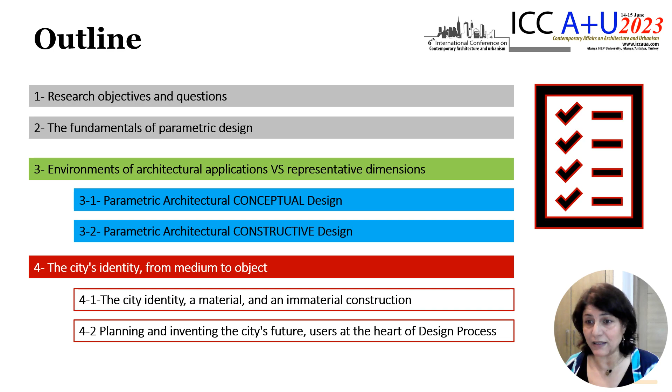I'd like to present the subject of my research entitled Parametric Architectural Design for a New City Identity, Materials, Environments, and New Applications. The outline of the presentation is structured as we present it through the methodological illustration. Our research is organized around four parts and is based on methodology that combines theory and practice.

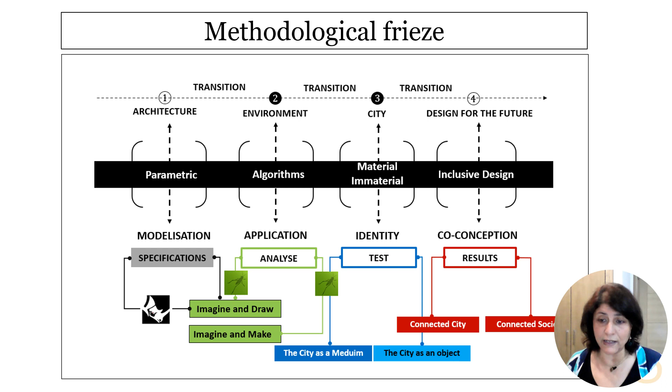First, we will start with an explanatory part dedicated to architectural application environments and their dimensions. Third, we will distinguish between the characteristic of the city as a medium and the city as an object. In the end, a new architectural vision will be discussed in order to include the user as the first actor in the design of his city.

Our research objective is to gather elements that could consolidate the new parametric modeling experiences developed by designers and researchers in spatial geometries with the new constraints of architectural construction, for a homogenized territorial interpretation and a better city identification.

The questions of our research are: what are the new investigation environments that parametric design explores to optimize the lived experience in the city? Does the architectural viability of the city rely on the safeguarding parameter of its environment or its constant updating? What are the required modeling parameters for an appropriate city transformation?

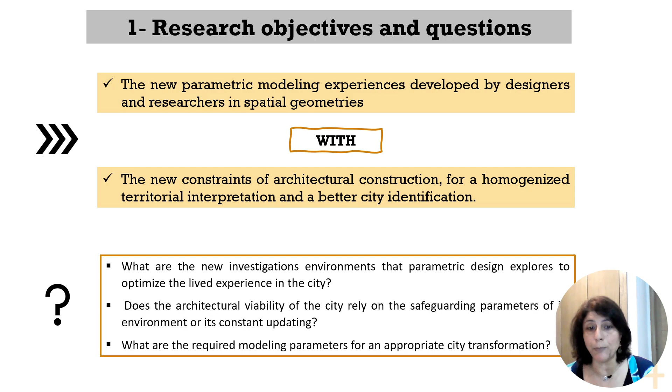Generated architectural modeling is a methodical design in which the insertion of sound, image, and architectural models is generated from the implementation of several rules depending on very specific algorithms.

Parametric architectural design is an innovative approach in the field of architecture that is intended to create buildings and public spaces using advanced digital tools. It's founded on the use of parameters that control all aspects of an architectural project, from geometry to environmental performance.

That's how John Frazer added that computer modeling is a method of virtual representation that provides a form of electronic prototyping.

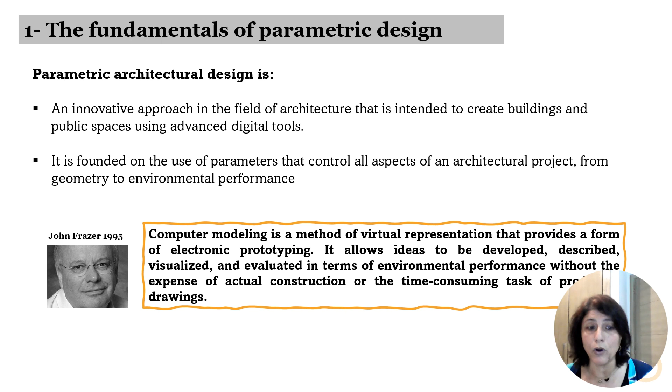Specific vocabulary refers to parametric architectural configuration. We can find Woodbury indicated that design is change, parametric modeling represents change. Jabi has identified both electronic prototyping and algorithm thinking. Ajla Aksamija has indicated that it's a quality of a generative design, and Helmut Pottmann identified a desired design outcome.

The description of parametric design basics in this section helped us understand that technological innovation, based on new digital performance software, is a process that is introducing change for the optimization of architectural modelization.

This illustration is a kind of summary that puts Woodbury's idea of change into perspective, combining urban planning research with conceptual design parametric and constructive design parametric.

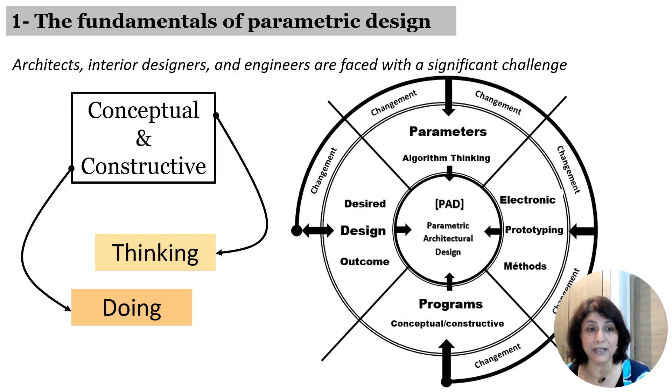To illustrate how innovation and creative master builders play a crucial role in architectural design, the second section of our research is structured around application examples of parametric architectural models, identifying the construction drawing of urban cities.

These examples will refer to the interoperability of two environments and are configured using Rhino 3D parametric design software with Grasshopper. As indicated in this table, we have two classes of parameters and classes of metaparameters: classes of parameters fixed around parametric architectural conceptual design, and metaparameter classes fixed around parametric architectural constructive design.

We can add to this configuration that form thinking, as imagine and draw, combines to form making, and imagine and make. Imagine and draw, imagine and make, are two classes of parameters that identify sizes, ergonomics, function in drawing, and usability, shapes, contours, functionality in making.

Lighting, dark, fashion, materials, climate, energy, environment in drawing; population, genome, fitness, selection, mutation in constructive. All these parameters are here to give us prototypes and results through visualization, simulations, and parametric models.

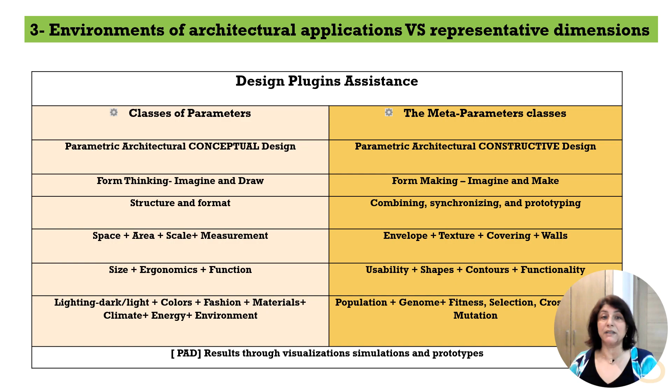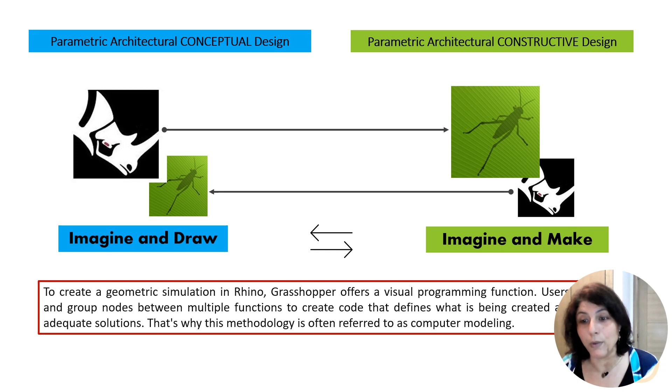Modeling and configuring the space becomes a tool facilitating the user's experimentation and integrating them at the same time into a reading and interpretation phase. In this sense, each modeling activity requires configured form thinking and creativity based on architectural knowledge. The interaction between thinking and doing will be explained by translating and transforming architectural knowledge into graphic form-making representation.

The particularity of the city is recognized through its climate, its environmental insertion, its urban structuring, and its appropriation. By configuring and classifying these parameters, Rhinoceros 3D and Grasshopper display the city and connect it with its environment in a way that optimizes its sustainability.

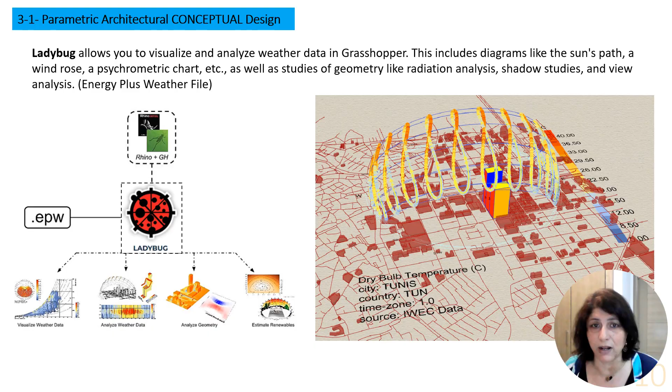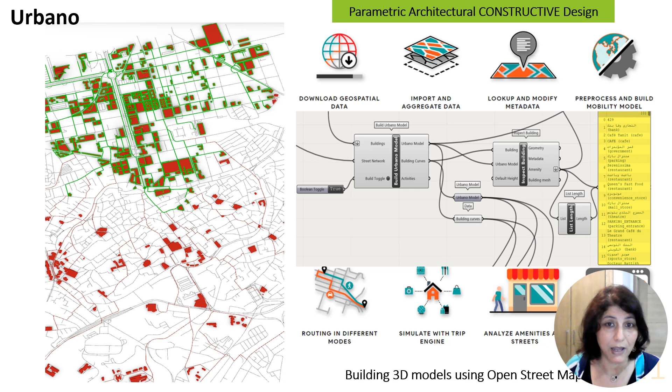To explore the cities geospatially in 2D and 3D, data is collected from the OSM OpenStreetMap website. As soon as the model is downloaded from the platform, it becomes usable in Rhinoceros Grasshopper. Here we can see an example with Urbano.

By combining Urbano with Galapagos, we can provide a prospecting genome to achieve fitness that can be maximized or minimized. Galapagos is an example of parametric architectural constructive design. And in the green illustration, we can see that Galapagos is minimizing mass addition, distances between the searched best points, and all amenities prospected on the map.

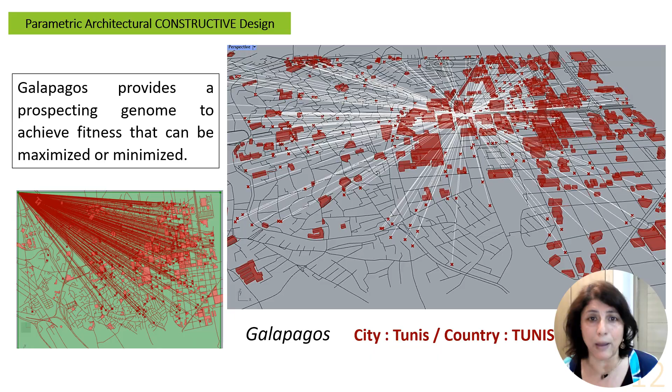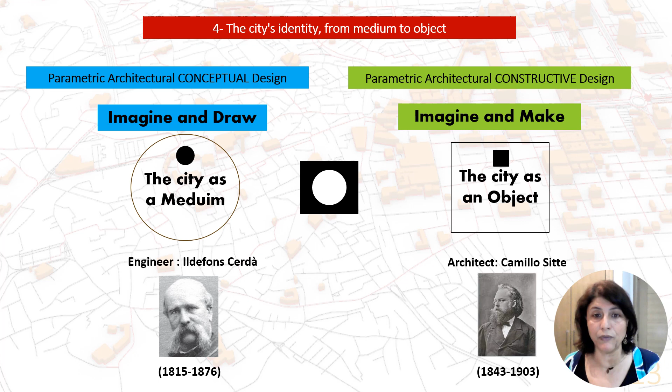In describing our result, we refer to two urban design pioneers and theorists. We propose two styles of discourse and two types of graphic representation, revolving respectively around the city as an object on one hand and the city as a medium on the other. We thus propose to link together two parametric design environments: parametric architectural conceptual design, which identifies the city as a medium, and parametric architectural constructive design, which identifies imagine and make, and the city as an object.

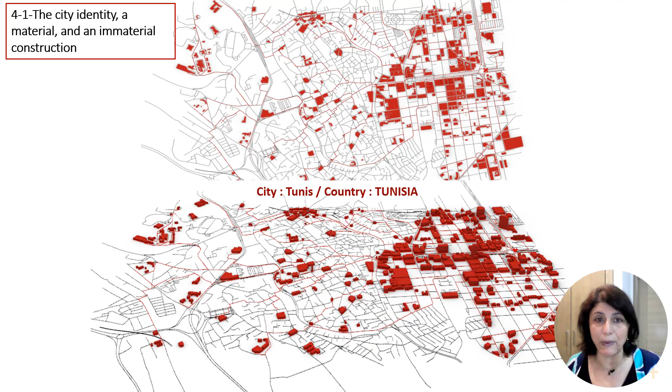The city is a physically and spatially complex entity combining economic, social, cultural, and environmental aspects. For this reason, urban design is a disciplinary field that links architecture and spatial planning. It's also a meeting hub for designers, engineers, artists, architects, and garden planners, all working together to satisfy human needs and expectations. This presentation tends to define the parametric context of the architectural design of the city as a new paradigm of creation and conceptualization.

Designers and spatial researchers conceive, plan, and implement change in the world around us. And this is the key issue for our humanity. Every activity is the result of a conscious, deliberate, and free human endeavor.

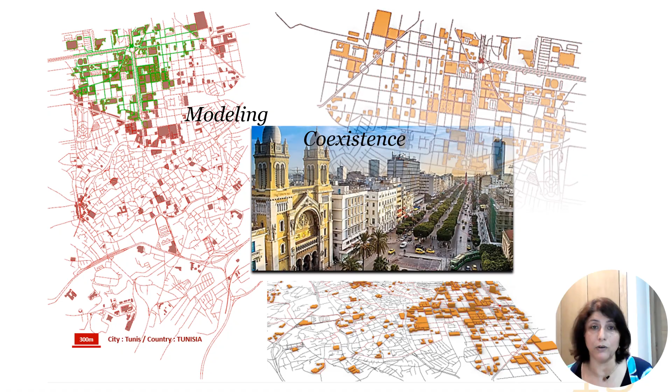Finally, every digital design and modeling result is an act of creation. Time is humanized by and through the act of creating, modeling, prototyping, and configuring. The experience of modeling and parametric architectural space suggests to designers and consumers of space to open up to a new culture of the conception of architectural projects, a culture based on a digital design environment, but above all on human methods and ways of thinking.

City design strategy should embrace citizens as the main actors in their lifestyle environment. The city is designed, previewed, and then visualized through the perception of its future user, who in turn is sensitive to the need to safeguard its history, enhance its identity, and ensure its sustainability.